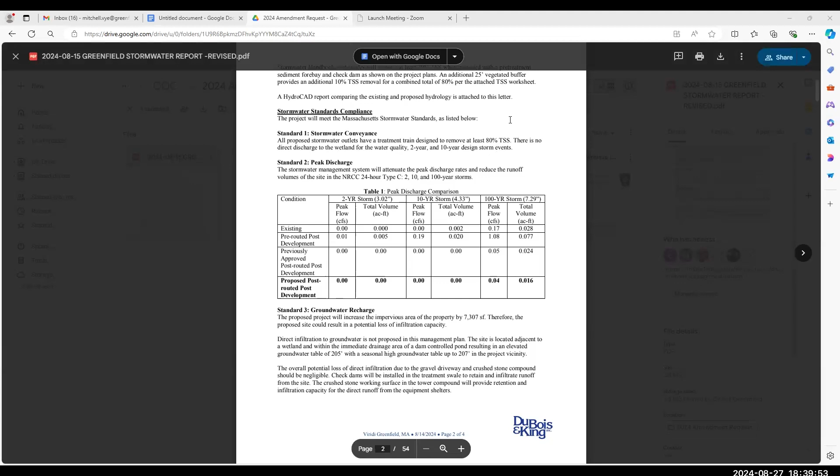which dropped the total volume discharged from the previously approved 0.024 acre feet to 0.016 acre feet. It also reduced the peak flow from the previously approved 0.05 to 0.04 CFS, which is significantly below the pre-routed existing discharge of 0.17 CFS and 0.028 acre feet at the 100-year storm. For the 2-year storm and the 10-year storm, there's no discharge from the treatment swale, so everything will be retained and infiltrated on site.

Appreciate you doing those calculations, and also it's great that you made some adjustment for the 100-year storm. We are getting those much more frequently, so it's really important to have that additional storage. Thank you. Does anyone else have anything?

Oh, yeah, go ahead. Yeah, I was just gonna, so just to clarify, this says previously approved post-development. That's the plan that has already been approved. And then the one in bold is what the proposed amended plan would be. And it's showing a reduction from what has already been approved. Is that correct? Correct. Okay.

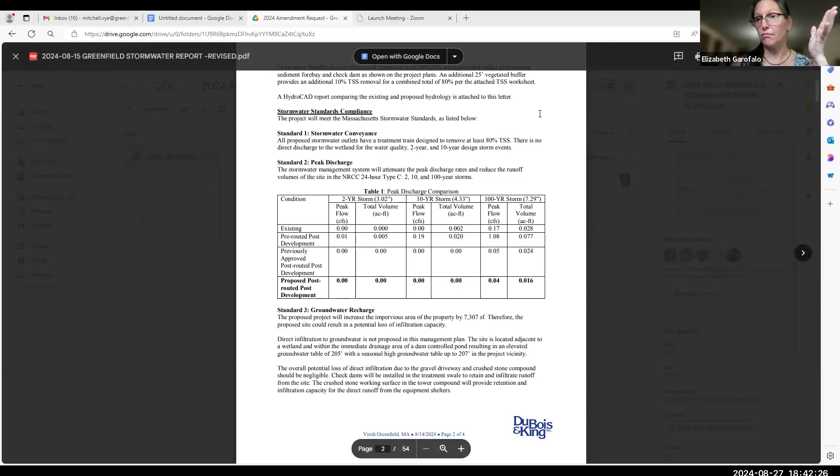If no one else has any, oh, go ahead. Sorry, do we have any photos that are new since the last time we met? Just asking if they exist, not that they need to. Yeah, I was just gonna say, do you want us to throw the updated plans on? And Lou can walk you through the changes.

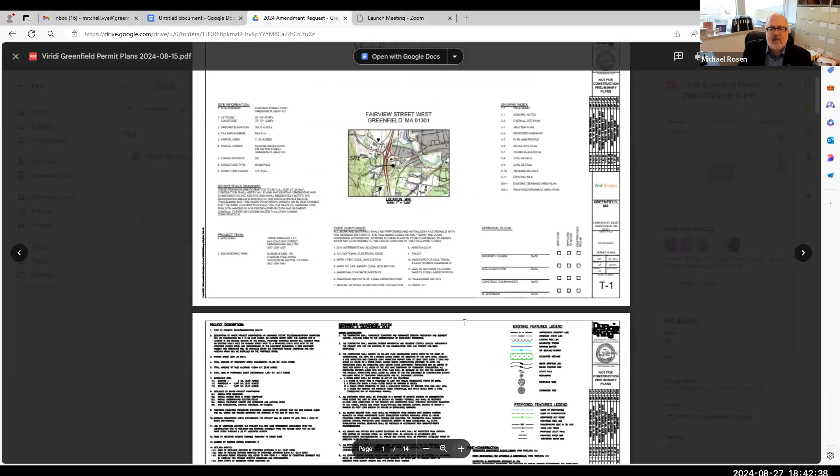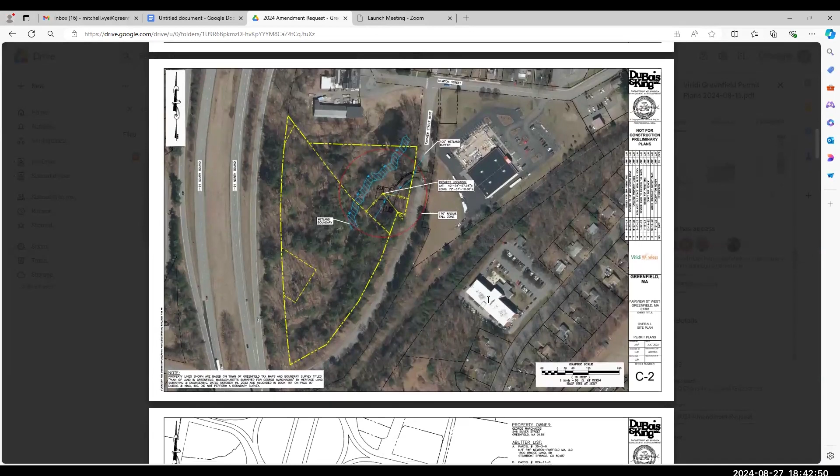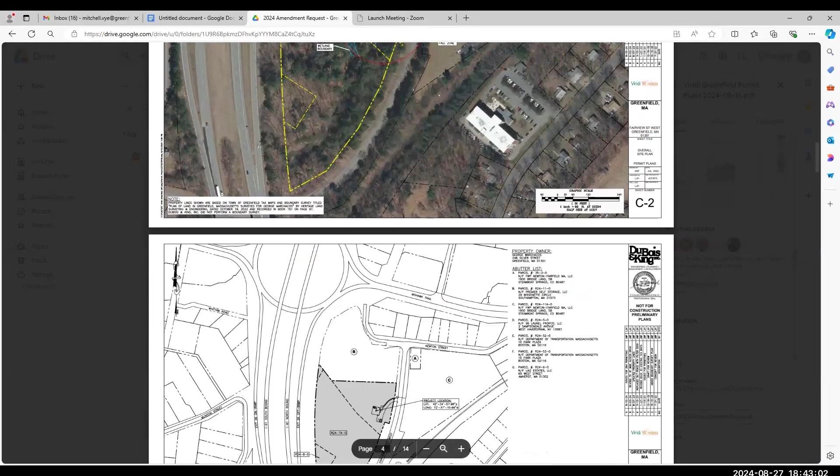So we updated a couple minor things, mostly for the zoning board meeting that we have in a month or so. Nothing that really applies to your board, except we increased the depth of the stormwater treatment swale. We had some clarification things that they require as part of their permit review process.

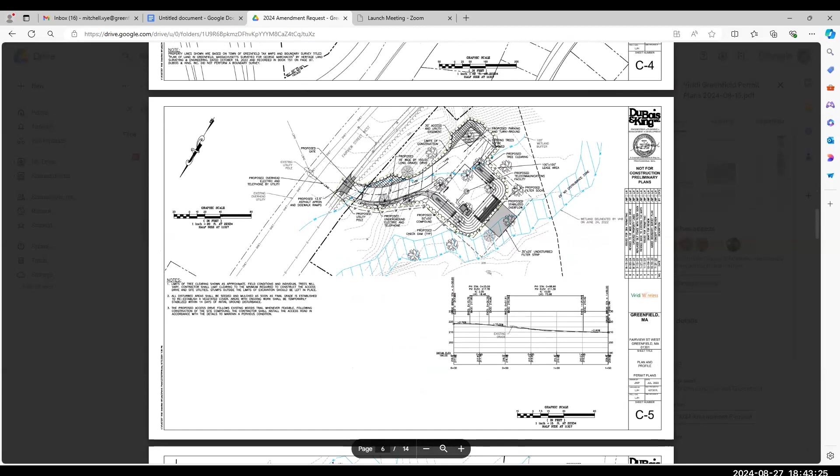So we incorporated those into this plan set, but the only change that affects your review is the widened access road from 12 to 18 feet, which if you go to the next page, it's a little clearer. The red outline is the access route as it was previously approved. And then we show the proposed access route and the proposed turnaround area outside the limits of disturbance within the wetland buffer.

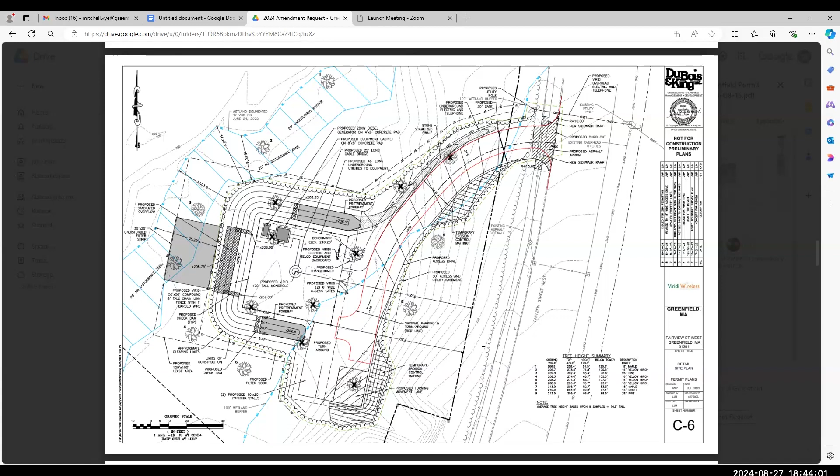Does anyone have any questions on the plans? I feel like I asked all my questions the last time we saw the plans, even though I guess it has changed slightly with the deeper basin, but otherwise, yeah. Point out to me where the basin is, I want to make sure I understand where the storage will be.

It completely wraps around the telecommunication compound. So where that gray hatched area is, that's a pretreatment forebay. And then it wraps around to the left, down the page and over to the right, like a horseshoe, with more pretreatment at the southeast corner. And then there's a stabilized overflow to an undisturbed filter strip before it discharges to the wetland on the left-hand side of the page. Right, I see that. Looks good. Thank you very much.

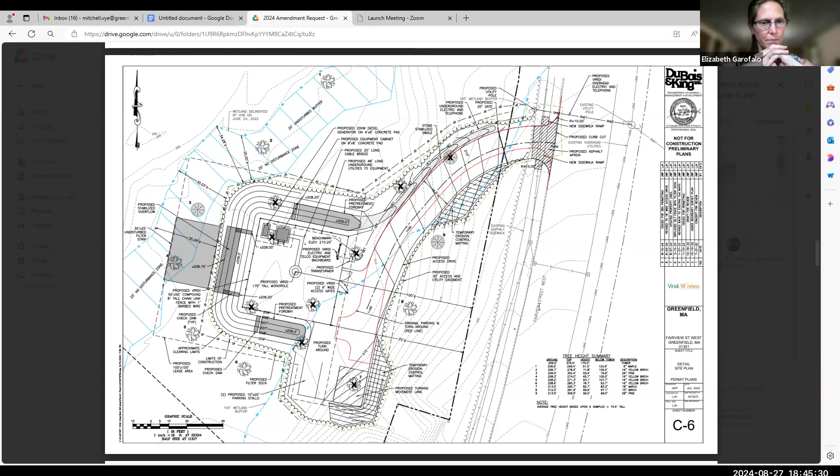Thank you. Are there any other questions from the commission? Okay. Do we have any DEP comments we need to review? No. Okay. I don't think they provide comments for amendments. I'm still just going through my list to make sure I don't miss anything. Yeah, we want you to check off every box.

Okay, so this is a public hearing, so at this point, we would open the public comment period. If there's anybody here from the public that has any comments they would like to make, this would be the time to do so. Beautifully quiet.

So hearing nothing and seeing nothing in the chat, I'm going to go ahead and say that we could probably close this particular public comment period. Given that this is a hearing, we do have to vote to close the hearing. Are we ready to do that, folks? Okay. So I'll make a motion to close the public hearing.

So a second from Emily. So I'm going to go with you, Emily, for passing this motion. Aye. Travis? All right. I'm also an aye. So, yeah, bear with me.

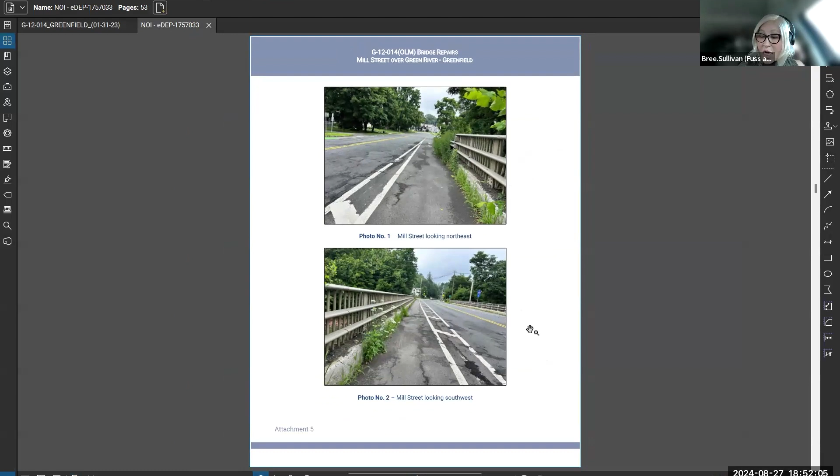In the documentation, we've provided photos of the bridge. This is the top side, what you see when you go over it today. There are a few things they want to correct with the railing. There's a 25-foot section of railing that's going to be replaced. That's pretty easy, no resource area disruption there. This is a view looking over the downstream side of the dam. Off to the left here is the mill museum. To take these pictures I went out on that little catwalk, which is there to operate, I believe, a sluice gate. I don't know that it's been operated in a while. Here I'm looking down at the catwalk.

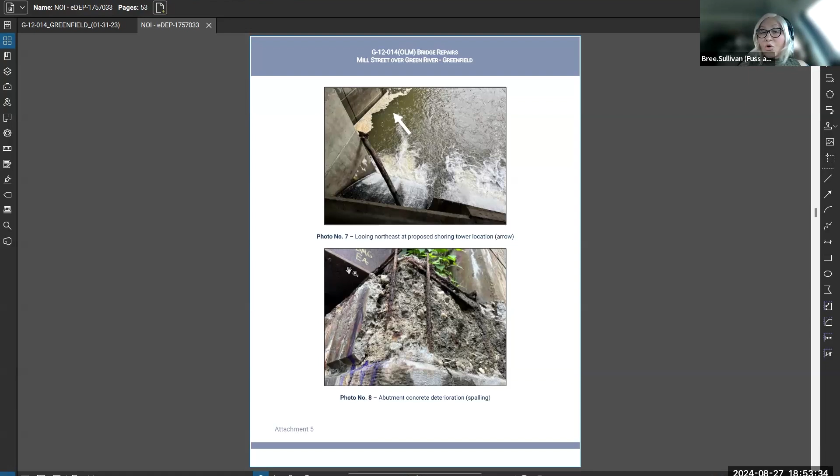This is the reason why we're here. This is the top corner of the bridge abutment, and you can see the rebar is exposed. The idea is to get that repaired before it becomes a bigger issue. To do that, the beam in the upper left-hand corner of photo 8 needs to be supported. They're going to put barriers on the bridge near this beam so nobody drives over it, and then shore this beam up with a shoring tower, which is going to require the shoring tower to be installed here in the waterway, directly below the beam.

In this area of the waterway, this is the spillway right here. There's a concrete wall as part of the abutment here, and this is the abutment. This is kind of still water here. There are definitely some current eddies, but there's really not a lot of flow here.

I'm going to switch over to the plan so you can kind of see what I'm talking about. So this is a plan view of the bridge. Here's the dam right here. The repair in question is in this area here. And you can see this is actually the profile view.

If you were standing in the river downstream of the dam, looking at the dam, this is what you would see. Here's the catwalk here. And the proposed shoring tower is going to go here. I know it looks like it's on the embankment. This is actually going to be placed on the footing because the footing sticks way out underwater.

When I was there, I actually took the measuring rod and I was able to probe in the water, and it's solid concrete and flat. So we're not talking about riverbed, stream bed disruption there. It's concrete.

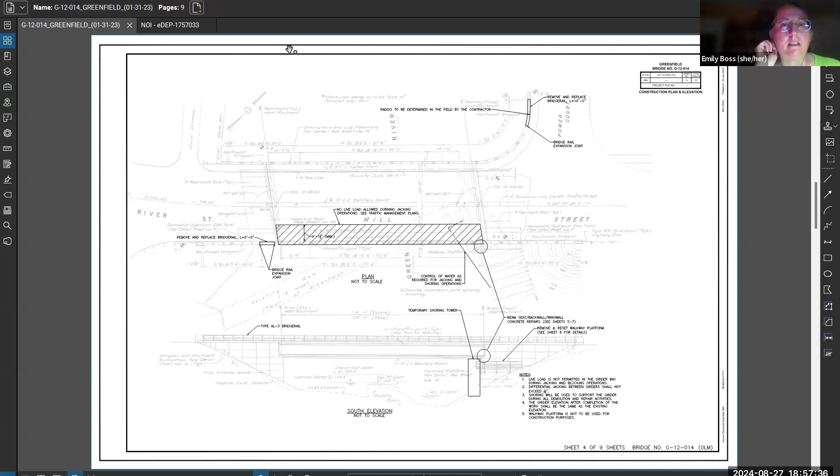I have a question about the 400 square feet that you said would be impacted, because it sounds like the support is going to be put on top of the toe of the existing pillar. Do you anticipate the disturbance coming from the work when it's being done, or is there some way that the embankment is going to be... I'm just curious what that impact will be. So it will be strictly limited to the temporary impact associated with construction operations. Okay. There will be no permanent impacts to the embankment or to the resource area. Yeah. All right, thank you.

I have a question about when they're doing the work. I assume there's going to be some sort of demolition of the current part that's falling apart and then rebuilding it. And I was just wondering what the plan is for making sure debris is not getting into the river. So typically, the scaffolding could have been used to do this, but it's going to be in the way of the shoring tower, so they have to remove it.

Typically, they put shielding around the area that they're working to catch any debris. The narrative talks about any debris falling in the water needs to be removed. There needs to be provisions to stop debris from falling in the water into the resource area. That can be made pretty clear at the pre-construction meeting with conservation and with the city. So it's probably a good thing to have that in the order of conditions.

But typically these are contractors that do this all the time, so they're really familiar with working over the resource area. But that definitely is worth mentioning to the contractor during the pre-construction meeting. Okay, thanks.

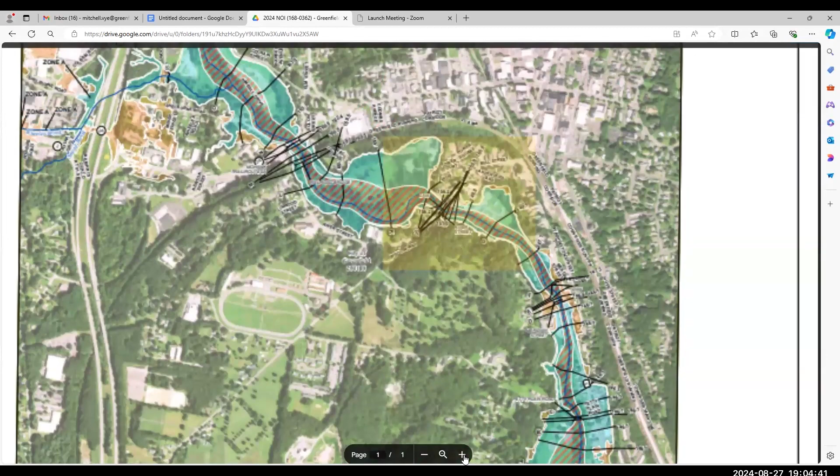I believe I included the documentation for the filing. We actually did file it electronically as required. And they're supposed to rule within 30 days. I haven't seen anything. Yeah, they can be slow. And please visit the FEMA mapping website for preliminary flood maps for Franklin County. I think I grabbed that somewhere. We're in this area. Interesting. Yeah, I didn't see that map. I only saw the historic map.

There shouldn't be any impact at all from this project. So in terms of the natural heritage, it seems important to make sure there's a determination so that if there's a timing issue about when the work is done or any other potential impacts, we can avoid them. Definitely. So we'll have to wait. And for now, just figure out if there's anything we need, any more information.

So I can't speak to number 3. When the contractor's on board, they will provide a plan that will show how they're going to set this up. That plan will be provided to the commission as well, and that can inform the discussion at the pre-construction meeting. So when we make decisions, we might include as conditions that we need to see the plan, make a site visit and approve. Okay. I think that makes good sense.

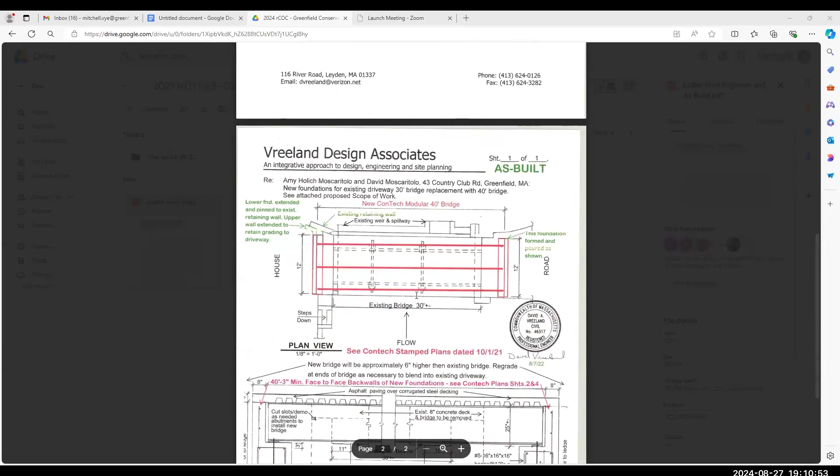Hi. So Mitch, what do we have for this particular project here? Yeah, so we have, I'll pull it up. Okay. They sent a letter from the engineer, just kind of saying everything went as proposed. Certified through the completion of the bridge replacement, the project and property were in compliance with the order of conditions. There's an as-built. I took some photos.

The order of conditions asked for an invasive management plan. Seems like they've been mechanically removing invasives. I think that's honeysuckle, but Virginia creeper, looks like. Oh, okay. We have a lot of honeysuckle and Virginia creeper. Yeah, and there's the honeysuckle. Yep. So that wasn't present when we initially proposed the project. The biggest issue was actually on the other side of our property, and that's now filled in with native jewelweed.

There was not a lot, but there was some multiflora rose that we mechanically removed and I maintain. And you can see I've planted a couple of hostas, but otherwise we've really kind of let that be. Mm-hmm. And yeah, this is the main area, right? Yeah, we have successfully managed the multiflora rose. Thank heaven.